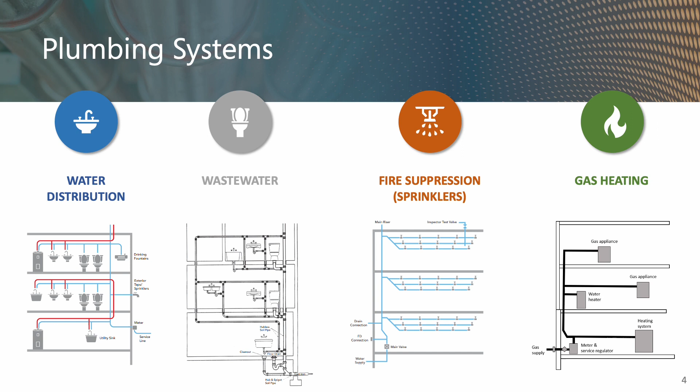So now we're going to talk a little bit about the basic types of piping materials. So there's a lot on this slide, I apologize. The main types of pipes that we look at are copper, which is mainly used for water and gas systems. Iron and steel pipe, which is used for wastewater, but also for gas. Plastic pipes, there's a lot of different kinds of these. We'll come back to that in a second. And they're used in a bunch of different ways in buildings.

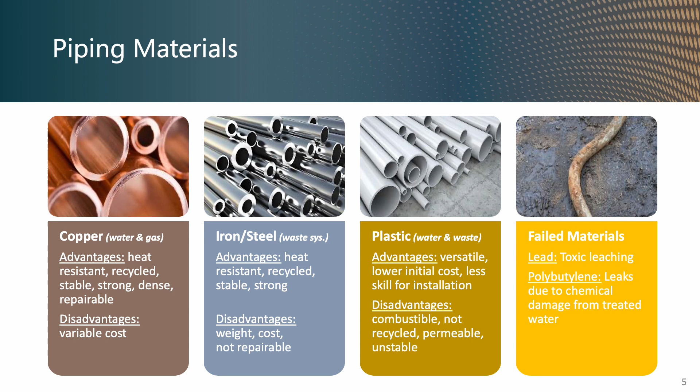And that fourth box there talks about failed materials. So that's important, because materials like lead and polybutylene plastic, which are no longer used and are being removed and replaced, can teach us important lessons about what happens when plumbing systems fail in a building.

The issue of lead poisoning has received a lot of attention over the last 10 years in the US. It's centered on a little town in Michigan called Flint, which changed the sourcing of their drinking water, pulled it out of a river. And what happened then was that lead started leaching out of their legacy lead pipes in the buildings, in the ground, and poisoning children, elderly, everyone in town, 100,000 people.

And for years, their day-to-day lives have been impacted as they had to drink bottled water, had to have filters, and were waiting for these lead pipes to be removed and replaced. So we had been using lead piping for centuries. We thought it was mostly safe. Turns out that wasn't true.

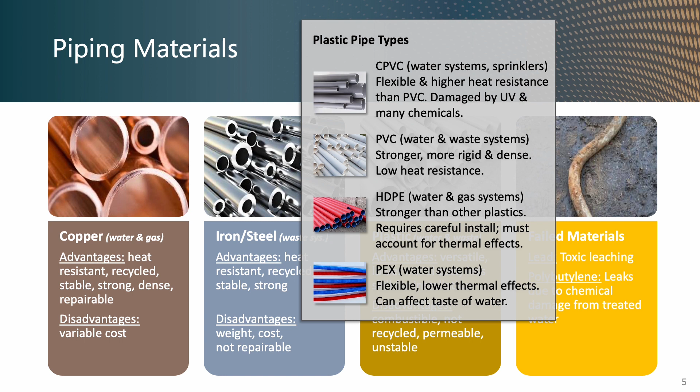So let's talk a little bit more about plastic pipes, because as we know, there's a lot of different kinds of them. The ones that we tend to focus on are CPVC pipes, which are used for fire suppression systems and a little bit for water systems. PVC pipe, which is used mainly for water and for waste. HDPE, used for water, and the PEX pipe, which is that flexible pipe that runs through generally for drinking water.

Each one of these types of plastic has quite different performance and quite different requirements for safety and reliability. And we'll talk a little bit more about that in a minute. So the varying characteristics of metal pipe versus plastic pipe means they do perform quite differently in the field.

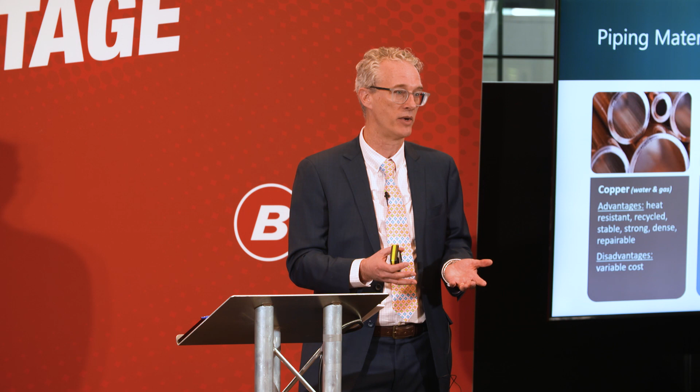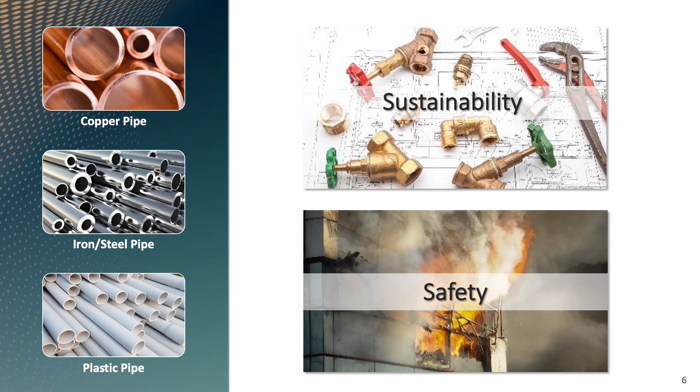But what ends up happening is that a lot of design and development discussions center on just one question: cost. How little can we spend to check the box and install a system in a building that meets the presumed spec? These kinds of discussions overlook two of our main factors, which are sustainability and fire safety. Let's see why those matter. We'll first talk about sustainability.

You may have heard that the construction industry is responsible for 30% of the world's energy use and emissions. I actually heard in the previous session that it's more like 40% or even more than that. But did you also know that construction is responsible for a huge amount of waste production? I'm sure you've thought about that, but in fact, in the UK, the construction industry is the second largest producer of plastic waste in the country, generating about 50,000 tons a year of plastic alone.

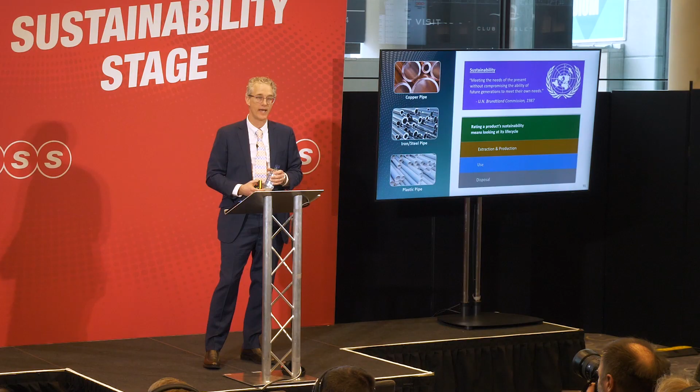So what this means is that if we want to move toward a more sustainable future, we need to improve how we design and build buildings, and that includes the piping systems. So the UN has been looking at sustainability for decades. And about 40 years ago, in 1987, they defined sustainability as doing things now that will enable the generations of the future to live and work productively.

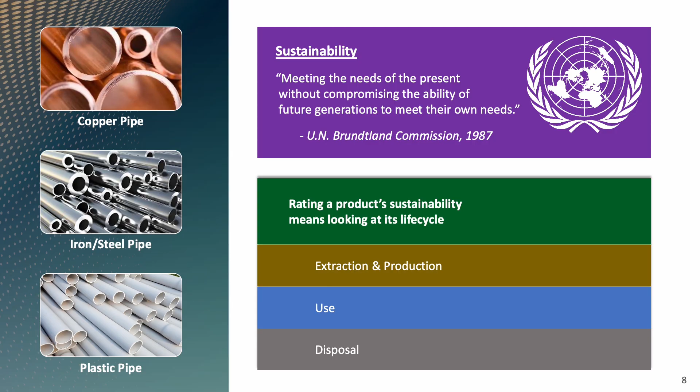What that means is we have to stop producing things in a linear fashion, where we extract materials, create something, and then produce trash, and move toward a circular economy. There's a lot of discussion of what that kind of circular economy is going to look like. I don't think there's a lot of answers. But we need to make sure that we're reusing more materials and creating smaller carbon footprints. Otherwise, those future generations are going to have a big problem.

So in order to understand what that means for piping, we need to look at the life cycles of the materials. What happens when the material is produced? What happens to it in use? And what happens at the end of life? We're going to start with copper. So copper has been used in plumbing for hundreds of years. You have to say, the extraction of copper from the ground and refining the ore into ingots and then producing them into products, all that has environmental impacts. It also has a carbon footprint.

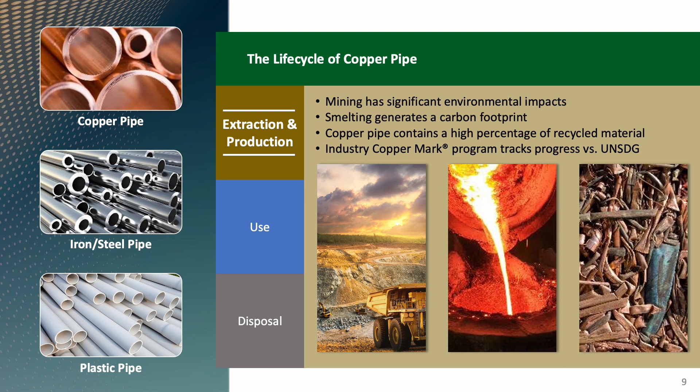That's true. However, once you produce copper, it's there. It can be reused basically infinitely. The copper that was produced in Roman times can still be used today. And some studies show that 2/3 of all copper ever mined is still in circulation. Major copper producers also have been transparent about the impacts that they're having, and they've subscribed to something called the Copper Mark program, which is an independent body that they've set up to track their progress against UN Sustainable Development Goals and require themselves to improve their operations and reduce those impacts.

In use, copper piping performs very well. It can last for decades, often beyond the life of a building. That's true for a lot of piping materials. They often outlast the life of the building. The metal in copper pipes is highly stable. It doesn't leach chemicals into drinking water. That's a good thing as well. And copper pipe is highly repairable. It does require training. You have to figure out how to solder and braze the stuff, but you can repair it.

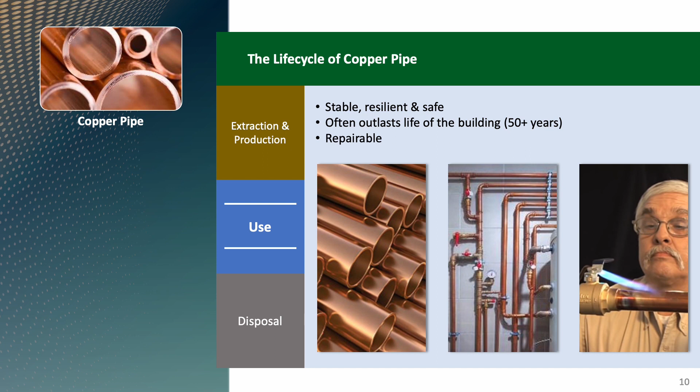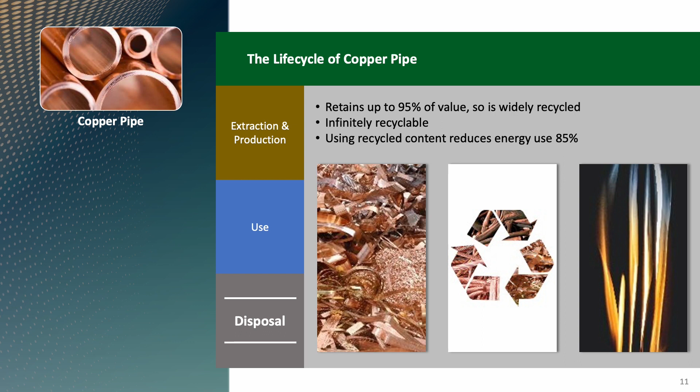Here's a big point. At the end of its use, copper retains its value. That's not just financial value, although that is very significant, but it also retains all its performance value. It has the same stability, the same ductility, and the same performance characteristics that it did when it came out of the ground. And that happens again and again and again. So reusing this resource not only reduces the amount that we have to take out of the ground, but it also reduces the amount of energy that's consumed to produce the product again by 85%.

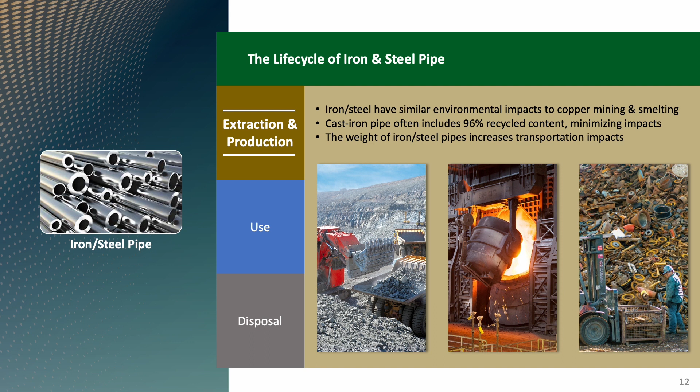So now let's turn to the life cycle of iron and steel pipe. To be honest, it's very similar to copper. So you still got to take it out of the ground, you still got to refine it. Those have environmental and energy impacts. In addition, the weight of iron and steel is significant, so that means it costs a little bit more to get it from point A to point B. On the other hand, though, that weight comes out to be a real advantage for many of the applications where iron and steel pipe is installed.

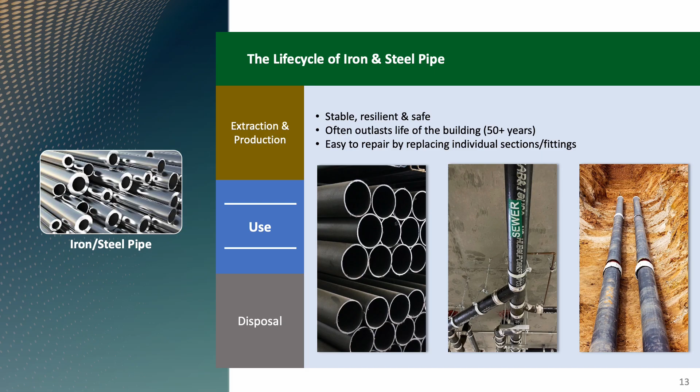Often these installations are below grade. They might be running under concrete. They might be running under the foundations of a building or under paving material. The fact that this material is so heavy and strong means that it will not deflect or crack the way some other materials will. And just like copper, after use, the iron and steel industries have set up mechanisms to reclaim and reprocess their materials. The Iron and Steel Institute pegs the recycling rate of steel at well above 60%.

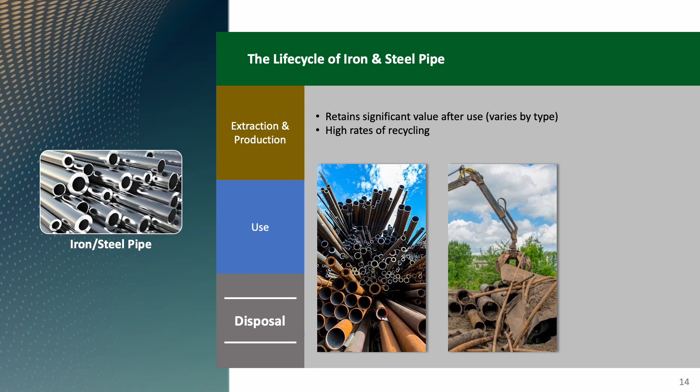Another good part about the strength of iron and steel is that when it's installed, let's say in that middle picture, you see a sewerage pipe that's installed in an exposed parking garage. If a truck or a car happens to bump up against that, it's not going to break. If you're in a stairwell and somebody's loading gear up that stairwell and they happen to bump the pipe, it's not going to break.

Now we'll look at the life cycle of plastic pipe. Just like for metal, the extraction and production processes are significant. They're not coming from mines, they're coming from drilling for oil or fracking for natural gas. That produces the feedstock, the little plastic pellets that are then formed into products. That impact means that you have a very significant carbon footprint for plastic.

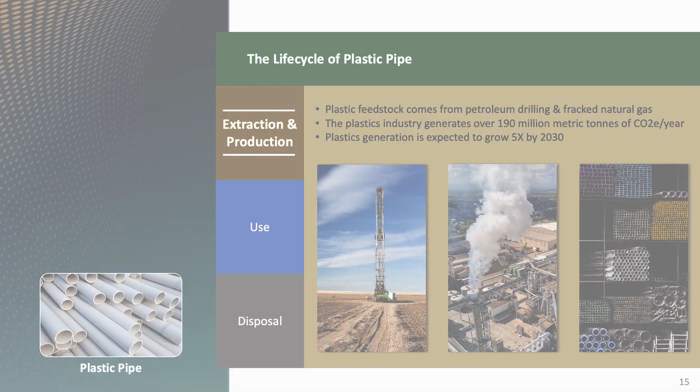What's probably more troubling than that piece is the fact that plastic growth has been generally unfettered over the last several decades, and it's projected to grow 5 times by the end of this decade. What does that mean for plastic pollution? What does that mean for the carbon emissions and footprint of the plastics industry?

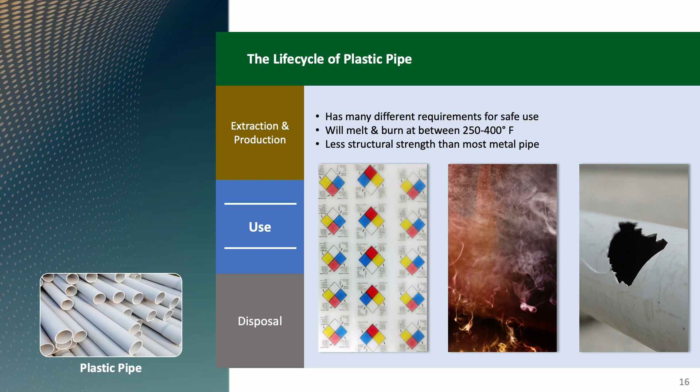In use, the different types of plastic, especially in the building industry, make it a little difficult at times to know what's an appropriate use. I was talking with a gentleman earlier, and he said often what he sees on job sites are a little bit of this over here, a little bit of that over there. It's pipe, right? That doesn't guarantee that it's going to perform reliably and over the long term, or that it's going to be safe. For example, PVC can't be used with very hot water.

It's also damaged by UV light, so if you put that in an area that's exposed to sunlight, it's going to degrade over time. HDPE pipe has significant thermal expansion and contraction factors. So if you put that into an unconditioned space, let's say an exterior wall or an unconditioned plenum, you better account for that expansion and contraction, otherwise you're going to stress your fittings or come outside your safety zones.

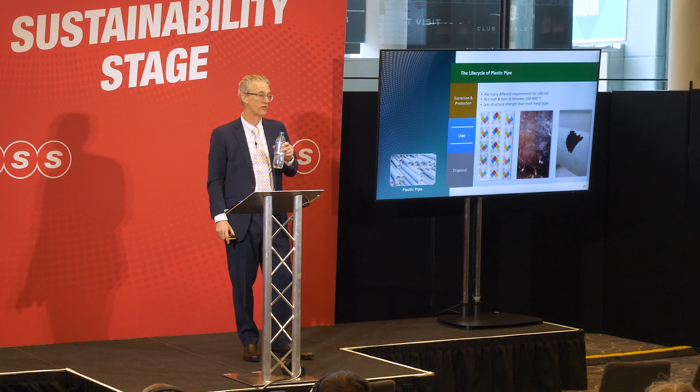Another interesting or challenging piece of understanding the different types of plastic is what kinds of chemicals can you use around them. Chemical compatibility: if you look at the guidance from manufacturers, their lists of base chemicals are pages long. You need a spreadsheet, and you need to understand and instruct your building maintenance teams what they can or can't use around certain types of plastic pipe. That includes things like solvents, lubricants, fire-stopping substances, mold abatement, HVAC heating and cooling fluids.

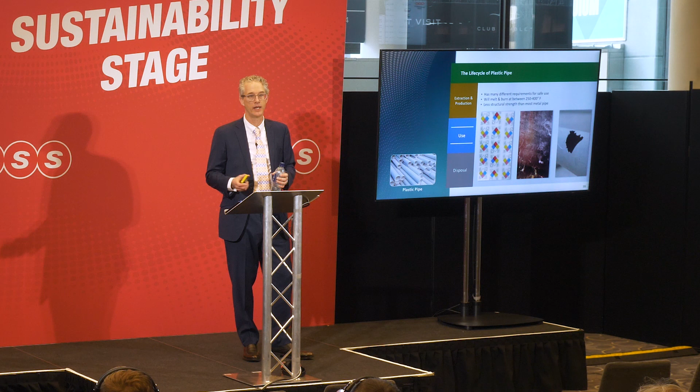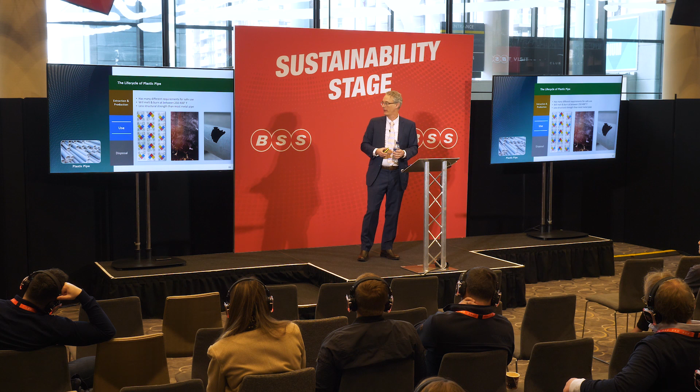You can imagine the kinds of accidents that can happen over the life of a building when you have plastic pipes in vulnerable positions. And then, of course, not to mention the physical impacts, like you can see on that pipe on the right. Something probably fell on it and broke it. And then we're going to talk at the end a little bit more about combustibility of plastic pipe and why that matters.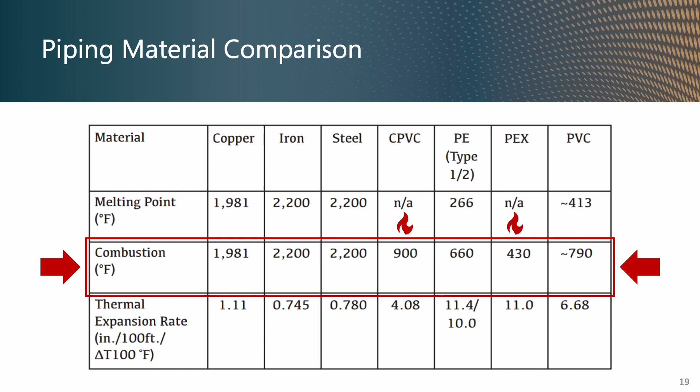So I also just want to point out the thermal expansion factor that I talked about before with HDPE pipe. You can see the factor of difference between metal and plastic there. So how do these numbers end up translating into real life?

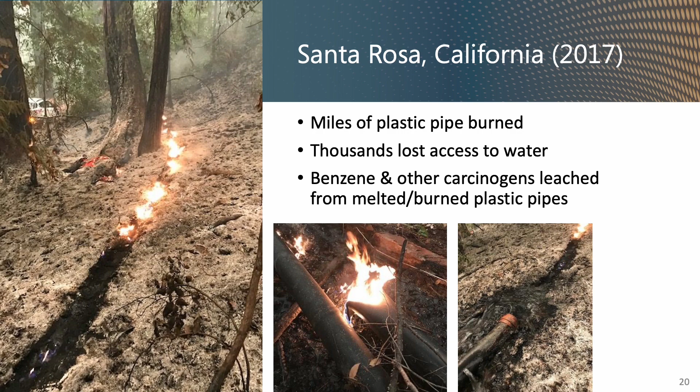Here's just one example. On the left, you can see an HDPE water main that, if you can believe it, they decided to install above ground in a wildfire-prone area of California, experiencing historic drought. And surprise, surprise, when a wildfire hit, the thing burned. Miles and miles of it burned. This left thousands of people in Santa Rosa without water for months.

And even when the water line was restored, the benzene that had leached out of these burned and melted plastic pipes had contaminated their water system. So all the absorbed benzene and other carcinogenic VOCs were inside their pipes. They got to remove and replace them at a cost of millions.

So here's another example the gentleman talked about before, Grenfell. This is not related to piping at all, but it is an illustration of what happens when plastic materials are used in a way that causes issues. Here you had a plastic foam sandwiched between some aluminum, and when that caught fire, the burning plastic increased the temperature of the fire. It helped spread the fire across vertical floors of the structure, and you can even see it in this picture, it generated a lot of toxic smoke.

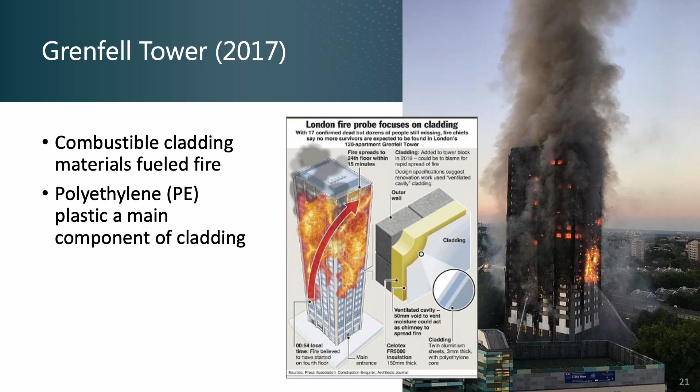In this tragedy, 70 people died, and the fatalities continue even today. One of my colleagues recently sent me a story saying that 12 of the firefighters who fought in this fire have been diagnosed with cancer that likely came from their exposure to chemicals released in the smoke.

Here's another, possibly the most striking illustration I've ever seen of research that shows what happens when you plasticize the built environment. The Fire Safety Research Institute completed a study a couple years ago. On the left side, you see a natural room. This is a room from the 1960s. If you haven't seen this video, please look it up, Google it, Fire Safety Research Institute, it'll pop right up.

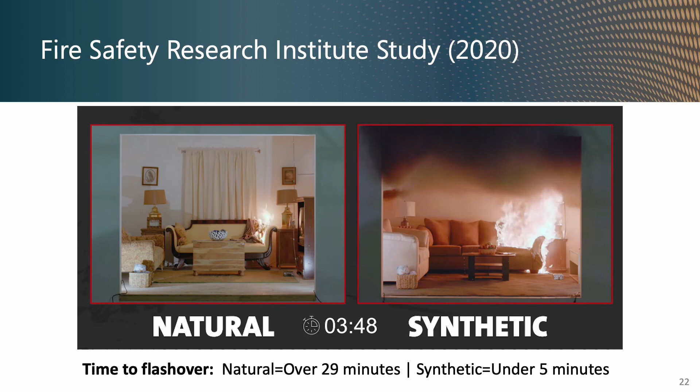So the 1960s environment, natural materials, wood, metal, natural fibers, cotton and wool. On the right side, you had more synthetics, polyester, plastic foam inside the cushions. When that caught fire, initially, the room on the right, for the first minute or so, had smaller flames. But within 5 minutes, that room was fully engulfed. You can see what it looks like now after 3 minutes and 48 seconds.

So despite the presence of fire retardants in these materials, the products burned. What happened on the other side, the natural room? After 29 minutes, it was still not fully engulfed in flame. What does that mean for the risks of the people who might have been in that room when the fire occurred? What does it mean for the risks of firefighters, or the chances of firefighters getting to a fire within 5 minutes, on the synthetic side, to put out that fire and stop it from engulfing the building as a whole?

So let's remember, plastic pipes are made of plastic. They will burn, starting with the exposed piping and then moving up into the walls. So we talked a little bit about the toxicity of what happens to plastic when it burns. There's been a lot of research on this, and they burn plastic pipes, capture the chemicals, the smoke that comes off of it, and analyze it with spectroscopy. And what did they find?

Purdue University professor Andrew Whelton also has looked at what happens to plastic pipe when it melts or burns, and then what chemicals it releases into water. We talked a little bit ago about the Santa Rosa fire and the presence of benzene there. He showed that in another wildfire, benzene coming from plastic pipes exceeded 40,000 times the safe limit of benzene that got into the water system, and again, couldn't be flushed. They had to remove those pipes and replace them.

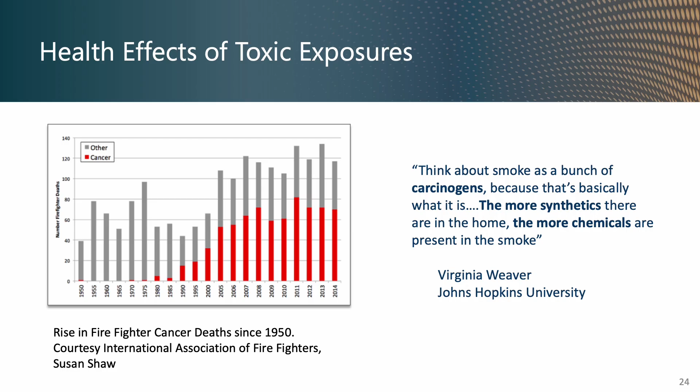Not coincidentally, that roughly corresponds with the increase in the use of plastics in the built environment over that same period of time. These firefighters, otherwise generally healthier than the normal average public person, are coming down with cancers of the brain, cancers of the reproductive system, cancers of the liver and the kidneys, all these organs that are exposed to these toxins over time as they breathe the smoke or get soot absorbed into their skin and get exposed to the toxins.

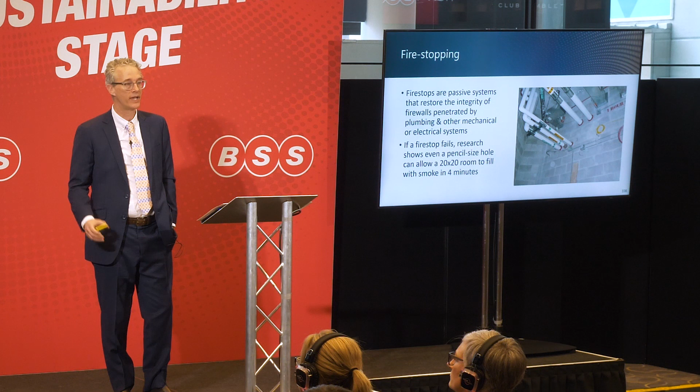So now let's talk a little bit about fire stopping. Fire stopping is quite a technical application. Sometimes it's done right, sometimes it's not done right. Very often, even the inspectors, I've been told, don't exactly know what to look for, because every single system is prescribed for a particular material and a particular spec for operation.

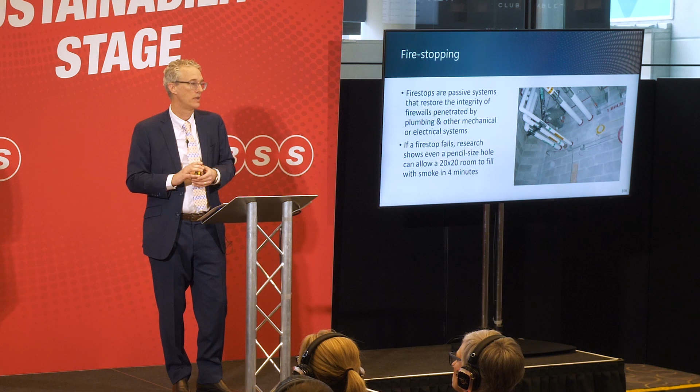For plastic pipes, the fire stopping degree of complexity is much higher than it is for non-combustible metal pipes. So you have a material that's going to burn or melt, you better make sure that you fire stop that carefully, because if there's a hole in a firewall that's meant to block fire from moving from one area of a building to another, that firewall might as well not be there. So we'll now take a look at what happens if you don't do it right.

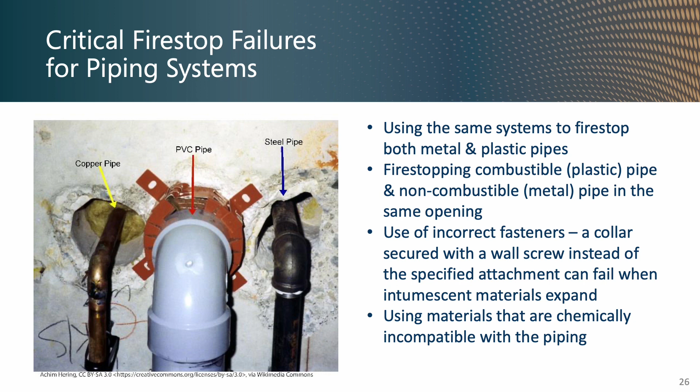It should be, because the intumescent foam that's meant to compress that pipe to seal off the opening in a fire, what happens to that if it expands and the collar isn't secured to the wall? It just pushes out both sides of the wall. Now the pipe can burn. There's a large hole in that firewall. And studies show, I think I showed this on the earlier slide, that even a pencil-sized hole in a firewall can allow smoke to come through to the next room in just minutes.

So I think what this calls into question is, as we build buildings, should we be putting higher degrees of complexity and difficulty in for critical life safety systems? A lot of critical buildings like hospitals or tall high-rises don't allow plastic pipes in them for just this reason. It's just too risky to put in plastic pipes that are difficult to fire stop. But should we be limiting that even more? I think the answer is probably yes, if you believe that some of this fire stopping is not being done right.

So I think we're down toward the end of our time, so I'll quickly sum up before answering any questions that you all have. So we talked about how the materials used for piping have big impacts on sustainability, from the beginning to use and to the end of their life cycles, whether they can either be reused or if they're going to be trashed. Then we talked about the importance of combustibility of pipe and what impacts that can have on life safety and health in the short term and in the long term, both for individuals like firefighters or for whole communities like Santa Rosa.